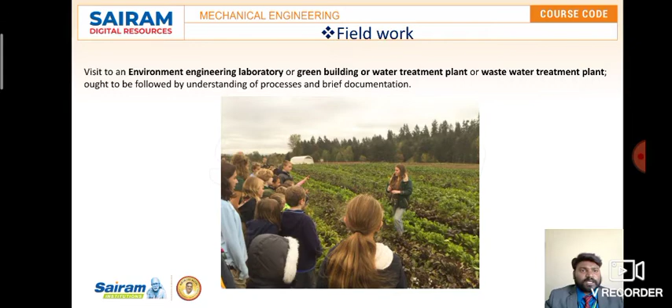Why it is required, all these things already we have seen in laboratory, and what is that engineering laboratory and green building, that I am going to explain in my next slides, and what are the different methods and assessments that we are doing. That already I have covered in my previous videos.

So first one, we are going to see green building. Why it is required: this is design, construction and operation, to reduce or eliminate negative impact and create positive impact on the climate and environment. Normally, in flyovers and buildings, we see plants are grown in some areas.

So they encourage planting trees, small plants, and all those things. They keep it for removing or eliminating or reducing the negative impacts falling on the environment. It's a great sign for all of us that it is a responsibility for everyone to plant a tree for the future generation. Because if the same thing happens the same way it is happening right now, it will create huge damage on the next generation. To avoid that, this green building concept creates awareness for people to improve the positive impact on climatic conditions and nature.

So what are these green buildings? They preserve precious natural resources and improve our quality of life. This will improve the way of looking at things, that perspective. So slowly we encourage people by doing this, sending the right signals to people for planting trees and all, to reduce the pollution which is happening, air pollution.

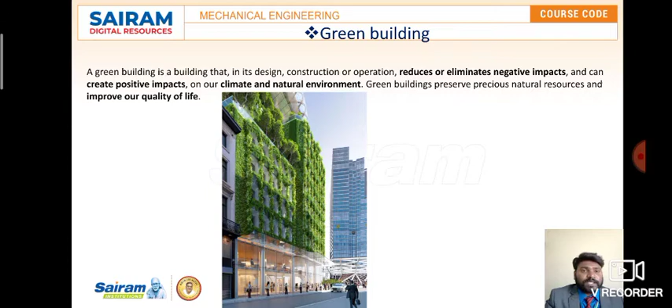So the next one is green building: what are the things that we can take, or how we can contribute? Suppose we are constructing a building or house, what are the things we can do from our side to contribute? For example, I am going to explain the conventional things and the other things that we can follow for the green building process.

First one is roofing for constructing a building. The conventional method is like tar, asphalt, and metal sheeting. Instead of that, roofing can be done in a non-conventional method, like rammed earth, green roofing as shown, or thatched. So these are the things for roofing that we can do.

Coming to walls, the conventional method is like wood, steel, or concrete. These are the things that we follow for constructing walls. On the other side, the non-conventional method is like bamboo sticks, fiber reinforced mortar, and recycled plastics that we can use for walls.

Next one is insulation. The conventional method that we follow is fiberglass and polyurethane foam. On the other side, the non-conventional method is straw bale, adobe, and recycled cotton. So the time has come for us to shift to the non-conventional methods.

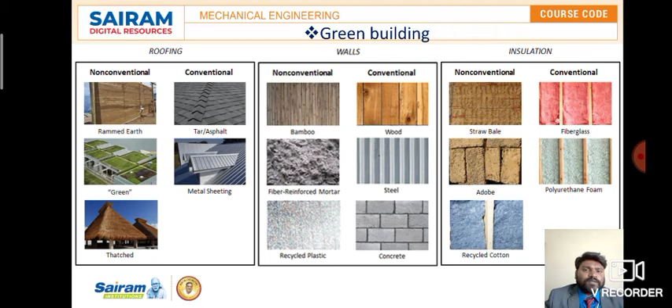As we saw in Module 1's starting chapters, we discussed the difference between conventional and non-conventional energies, which is nothing but non-renewable and renewable energies. Now attention has been given to renewable energies like solar, wind, and tidal energy. So, to reduce environmental damage, we have to switch over to non-conventional methods to improve green building.

Now, coming to green building, what are the things it includes? What are the different features that can make a building green? The first one is energy resources.

Efficient use of energy, water, and other resources - we have to use it effectively. Usage of renewable energy such as solar, wind, tidal, and hydel energy - we have to use renewable energy instead of non-renewable energy such as fossil fuels.

And the next one is reuse and recycling. Lots of waste materials are being dumped into the environment, so we have to focus on reuse and recycling, pollution and waste reduction measures, and enabling of reuse and recycling.

Then indoor environmental air quality - there should be good indoor environmental air quality. It should be pleasant, and the air quality should be pure, without any foreign particles or harmful gases.

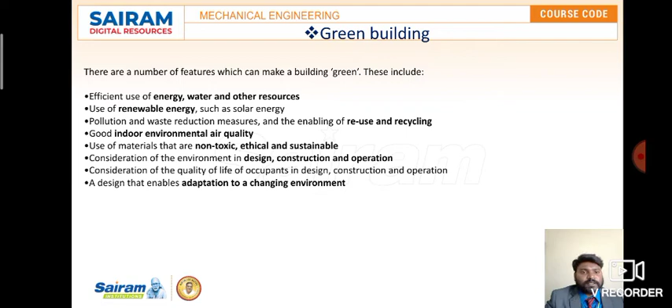A design that enables adaptation to a changing environment. Earlier we followed methods not useful for the environment; now we have to adapt to change. That kind of design we have to adapt so the environment will be good, and it will be good for our future generations too.

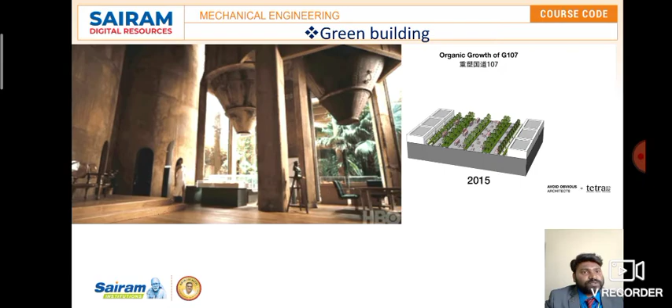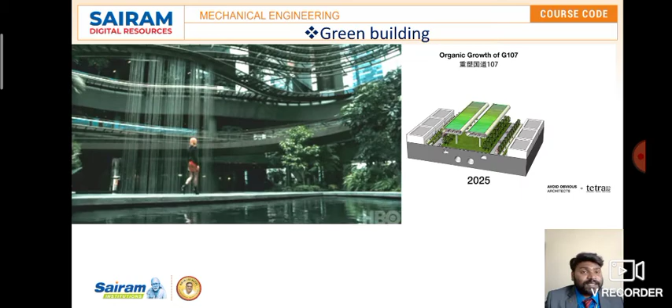So this is a green building.

Now coming to this environment engineering laboratory. So different laboratories that we see, like chemistry laboratories or physics laboratories, and also environment engineering laboratory. So what does that do?

They will take the broad scientific topics like chemistry, biology, ecology, geology, hydraulics, hydrology, microbiology and mathematics. All these areas they cover in this environmental engineering laboratory, to create solutions for everything to protect and improve the health of living organisms and improve the quality of life.

They check the water quality, the air quality, soil quality. In each and every department, they try to improve the quality of life and make the living organisms feel comfortable. So what topics do they cover? All those different fields I have spoken about - they take help from them to improve the health of living organisms and the quality of life in environmental engineering laboratories.

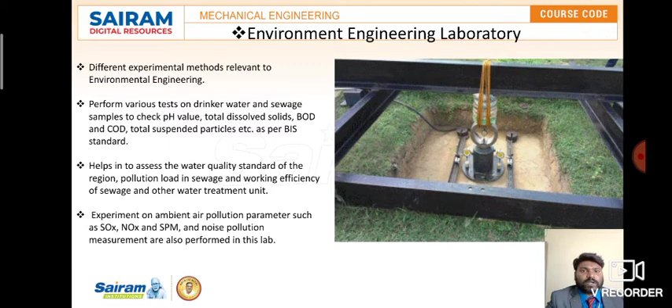Different experimental methods relevant to environmental engineering will be done, and different tests for drinking water and sewage samples, checking pH values, total dissolved solids, biochemical oxygen demand and chemical oxygen demand (BOD and COD), and total suspended particles present in water, as per BIS standards.

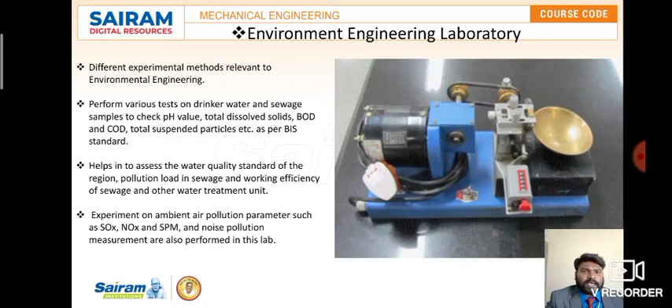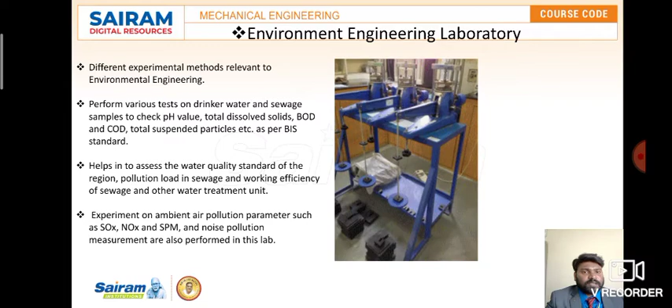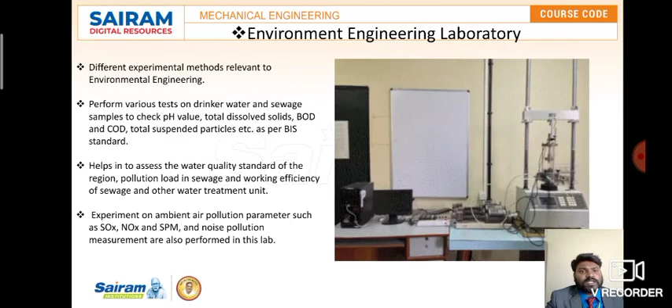And then they assess the water quality standard of the region, pollution load in sewage, and working efficiency of sewage and other water treatment units. Then experiments on air - ambient air parameters such as oxides of nitrogen, sulfur dioxide, and suspended particles, and noise pollution measurement are also performed in this lab. So all these areas are covered in the environment engineering laboratory.

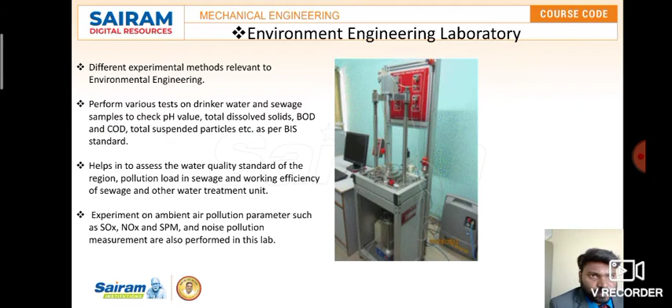Next, there is a picture which I have posted here for your reference - a sample picture which resembles the environment engineering laboratories. They check each and every field, like soil, air, plant, forest, and noise pollution. So all these areas they check, and try to improve the quality of life for human organisms.

So this is the water treatment plant. It will have 5 objectives for a typical large water treatment plant. They are pre-treatment, pre-filtration, filtration, chemical treatment, and disinfection.

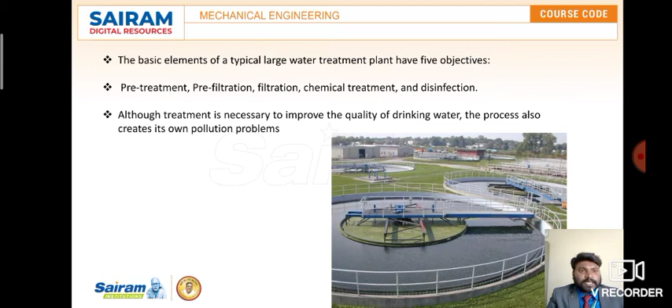So pre-treatment will be done, and filtration, pre-filtration, again filtration, and chemical treatment, and if infectious bacteria are there, disinfection will be done. Although treatment is necessary to improve the quality of drinking water, the process also creates its own pollution problems. But there is another advantage - our own pollution problems will be eradicated slowly by doing this water treatment. This is the working principle, for your reference, of how that water treatment plant works and functions.

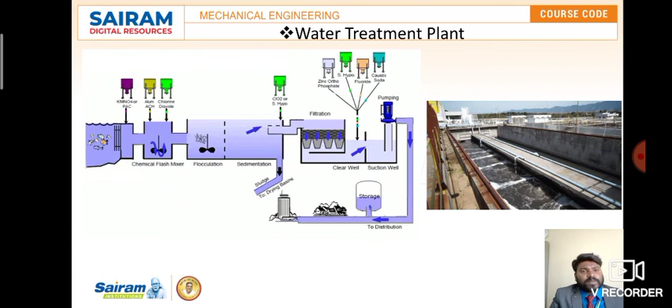The chemical flash mixer, sedimentation process where the remaining sludge particles come down, and then the clear well and suction well for storage. So this is the process, for your reference, showing the working principle of a water treatment plant.

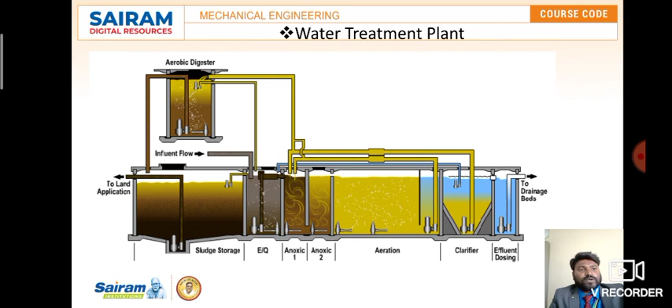And then this is another water treatment plant, in another view - aerobic digester will be there, and anoxic 1 and anoxic 2, sludge storage. So this is another example that I can show for water treatment plants.

So we have covered in this video how water treatment plants, environmental engineering, and green buildings work. These are the three things that I have covered in this video. Thank you very much for watching. Thank you.